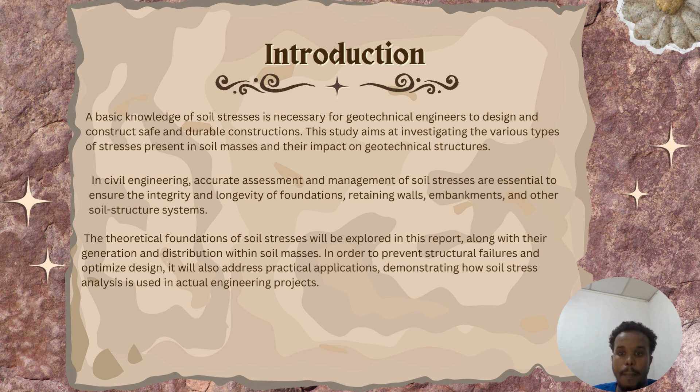I am Muhammad Denis Shekar, and I'm going to present the application of the importance of soil in civil engineering. First of all, it's important for foundation design because foundation stability depends on the soil properties and stresses. Engineers must design foundations based on the specific soil characteristics to ensure structural stability and safety.

It's also important for hazard assessment because understanding soil stresses helps identify potential hazards like liquefaction, sinkholes, and subsidence. Early hazard detection allows engineers to take preventive measures and protect people from potential dangers. Finally, the field vane shear test. This is used for measuring the undrained shear strength of cohesive soil. Useful for assessing shear strength of material like mortar and snow, which can cause landslides.

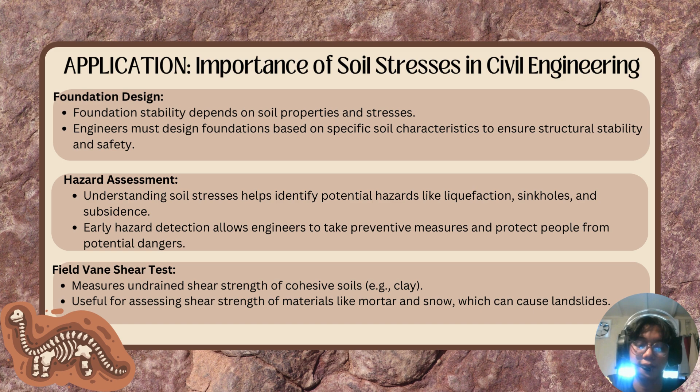Now we will take a look at the soil testing methods that can be applied to understand the characteristics of soils. The first one is the cone penetration test. This test's purpose is to determine the soil characteristics and geological conditions, and it is applied to assess the soil density and behavior to evaluate soil resistance to collapse and predict soil response to earthquakes.

The second test is the Mackintosh probe test. The purpose is to assess the soil bearing capacity, especially on soft surfaces. It is applied in site investigation, foundation design, slope stability, and compaction control. And finally, we have the sieve analysis test, whose purpose is to determine the particle size distribution of granular material, and it is applied in road construction, filter design, foundation design, and earthwork.

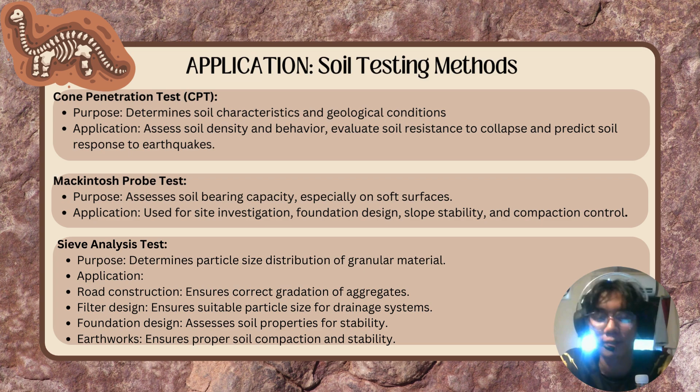Previous case study. So in this project, we will have four different case studies related to our topic. In case number one, we have finding soil particle size through electrical resistivity in soil site investigations. As we know, determining particle size is crucial in civil engineering due to its impact on soil strength and behavior. Also, traditional methods like sieve and hydrometer analysis are time-consuming, costly, and can disturb the soil samples.

So, in this case, the primary objective of this research is to develop and validate a method for determining soil particle size distribution using electrical resistivity measurement. The study aims to establish a correlation between soil resistivity and particle size, providing a simpler and more efficient alternative to conventional sieve analysis.

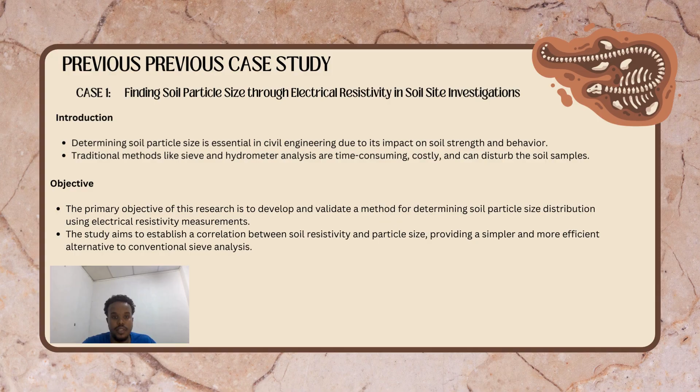So let's move into the methodology. During this research, we collected soil samples from 7 different sites at UKM and labeled them A to G for analysis. Sieve analysis was conducted according to ASTM D422 standards, and electrical resistivity measurements were taken using a high-resistance digital multimeter at different moisture contents, which are 6%, 10%, and 14%.

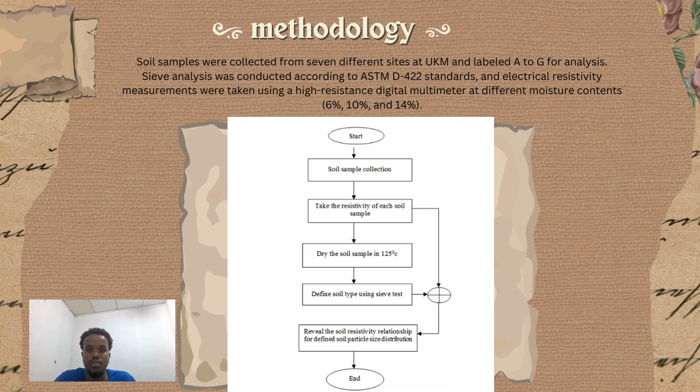As you can see in this figure, we have the flow chart of how we did this research. First, we do the sample collection, then take the resistivity of each soil sample, and we dry the soil sample at a temperature of 125 degrees Celsius. After that, we define the soil type using the sieve test, and in the last stage we revealed the soil resistivity relationship for defining soil particle size distribution.

So after we did the test, we came out with these two graphs. The first one represents the particle size distribution of soil types A, B, and C, and the second one is the soil resistivity measurement. The particle size distribution curves of soil types A, B, and C show the percentage of gravel, sand, silt, and clay in the soil samples.

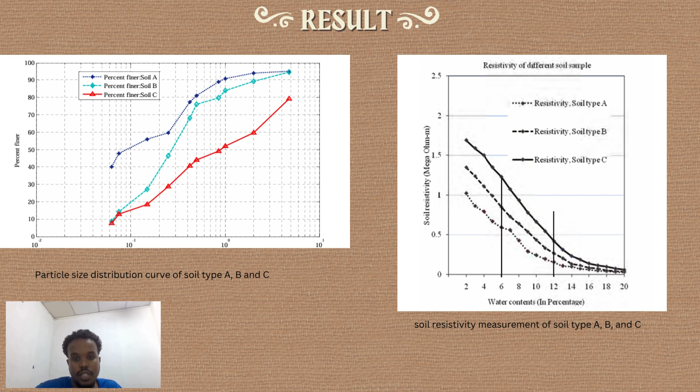So in the soil resistivity measurements, we also took different moisture contents of 6%, 10%, and 14%, showing a correlation between soil resistivity and particle size. Soil type A shows a resistivity of 0.41 megaohm meter, soil type B shows 0.67 megaohm meter, and soil type C shows 0.89 megaohm meter at 8% moisture content.

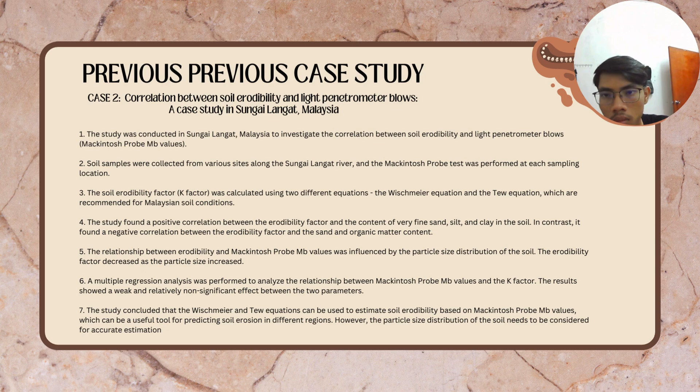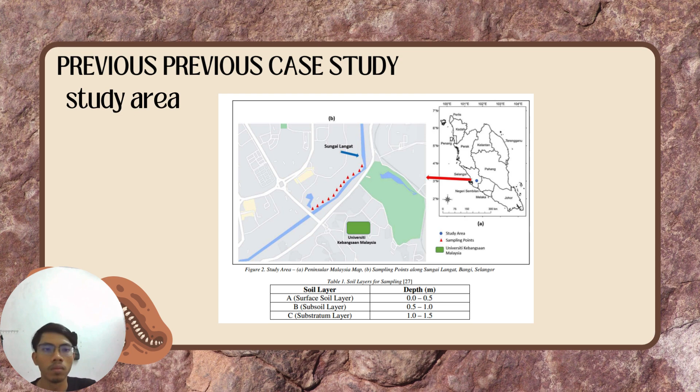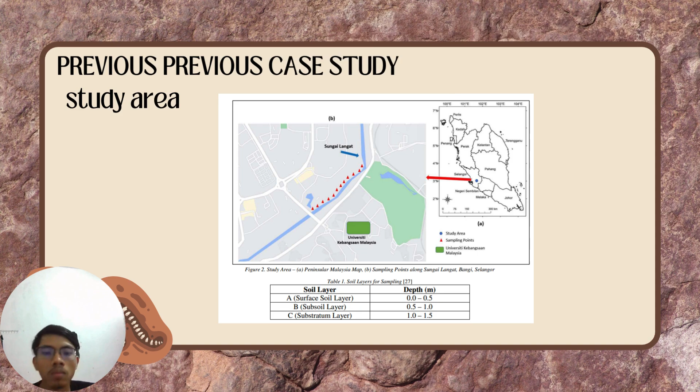The second one is descriptive statistics. The mean values of the K factor for the collected samples from the Sungai Langat site were 0.0050 and 0.0045 for the Tew equation and Wischmeier equation respectively.

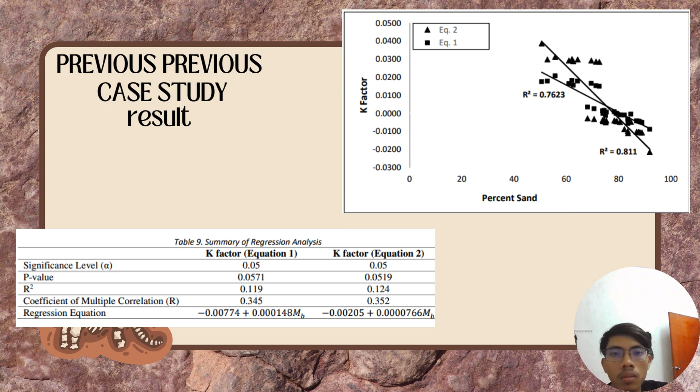And then I will continue about the result of the Mackintosh probe. The first one is Mackintosh probe value. The Mackintosh probe values range from 23 to 241, indicating varying levels of soil resistance to penetration. Number two is correlation with soil properties. The Mackintosh probe values were positively correlated with the fine sand, silt, and clay content, indicating that these particles contribute to the soil resistance to penetration.

The values were negatively correlated with sand and organic matter content, suggesting that these particles reduce the soil resistance to penetration. And the last point is regression analysis. A multiple regression analysis was performed to analyze the relationship between Mackintosh probe value and K factor calculated from both the Wischmeier and Tew equations. The results show a weak and relatively not significant effect between Mackintosh probe value and K factor, with p values of 0.0571 and 0.0519 for the Wischmeier and Tew equations respectively. Thank you.

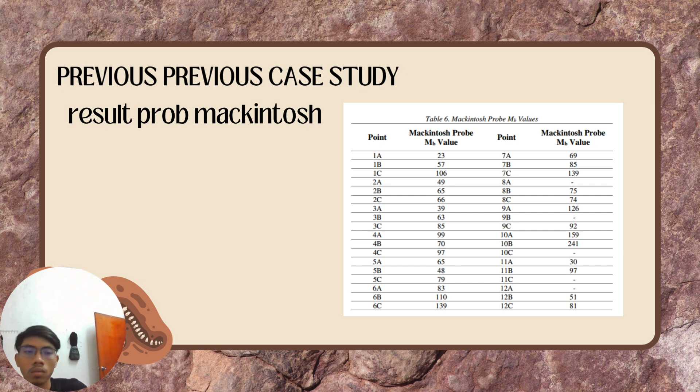Now I'm going to give an overview of my case study, which is case study 3. This project is done nearby the Civil Engineering Lab at Ungku Omar Premier Polytechnic, and the purpose of the research is to discover the relative density of granular soil.

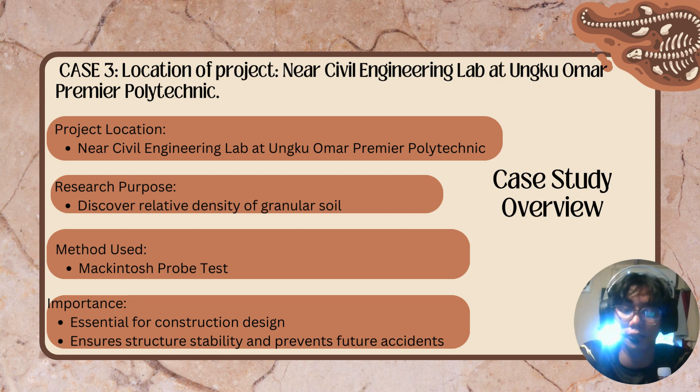Mackintosh probe is used during the test, and this test is important because it's essential for the construction design, to ensure structure stability and prevent future accidents. As for the details of the Mackintosh probe test, the reason we chose Mackintosh over borehole is because the soil at the site is too soft for borehole sampling.

Examples of site soil are gravel, sands, silts, clay with sands, and weak rocks. From the test, we will get soil samples with moisture content info. We will also get soil type identification and classification. And finally, the soil samples can be tested for shear strain disturbance in the lab.

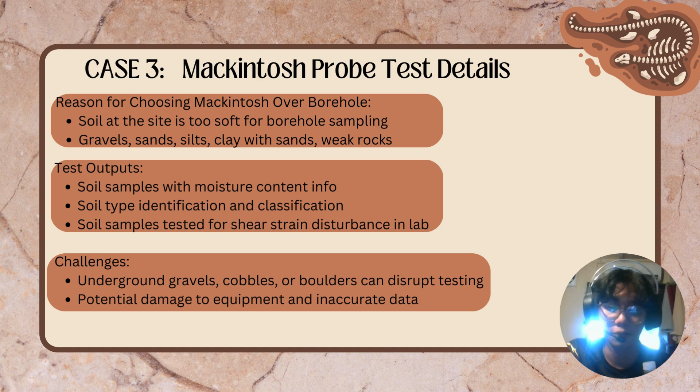Challenges of using the Mackintosh probe test are that underground gravel, cobbles, or boulders can disrupt the testing, there could be potential damage to equipment, and we could gain inaccurate data. The equipment that we will be using during this test is a rammer set, 1.2 meter steel rod, brush, ruler, coupling, bullet clamps, pipe wrench, chalks, and grease oils.

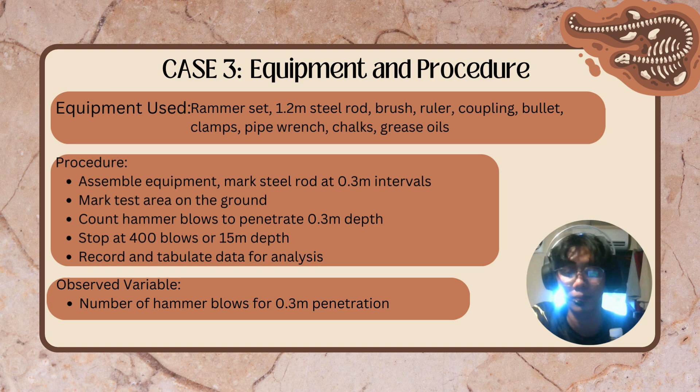The procedure is like this. Firstly, we assemble the equipment, mark the steel rod at 0.3 meter intervals, and then we mark the test area on the ground and count hammer blows to penetrate until 0.3 meter depth. Then we stop when the blows reach 400 blows or 15-meter depth. Then we record and tabulate data for analysis. From this observation we will get the number of hammer blows for 0.3 meter penetration. Now I will present the results and analysis from this research.

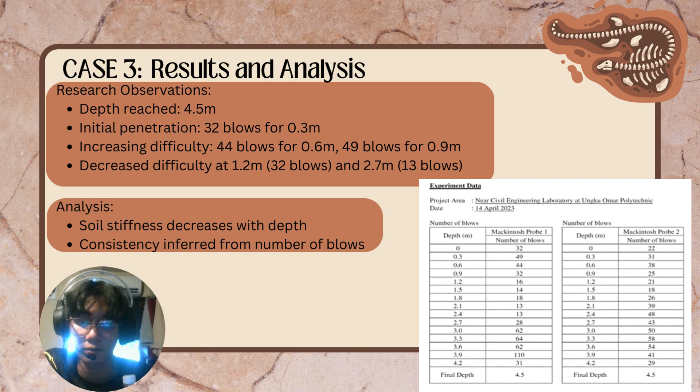Research observations state that the depth we reached is 4.5 meters and the initial penetration took about 30 blows for 0.3 meter. Then the difficulty increased, as it took 44 blows for 0.6 meter and 49 blows for 0.9 meters. But then the difficulty decreased at 1.2 meters, which is 32 blows, and 2.7 meters, which took only 13 blows. The analysis we can take from this test is that soil stiffness decreases with depth, and consistency is inferred from the number of blows.

So for case 4, geotechnical properties of waste soil from a closed construction dumping area in Serdang, Selangor, Malaysia. The waste soil is collected from a closed construction dumping area near Petronas Solaris, Serdang, Selangor. The soil originated from the construction of nearby buildings, which are nearly completed. The site was selected because it contains construction waste that meets the study's criteria. Three samples are collected from different locations within the dumping area.

Four tests are conducted on the samples to determine their properties. The first test performed was a sieve analysis to determine grain size and classify the soil. The study aims to determine geotechnical properties of the waste soil. The research process is depicted in a flowchart starting from a literature review to property determination.

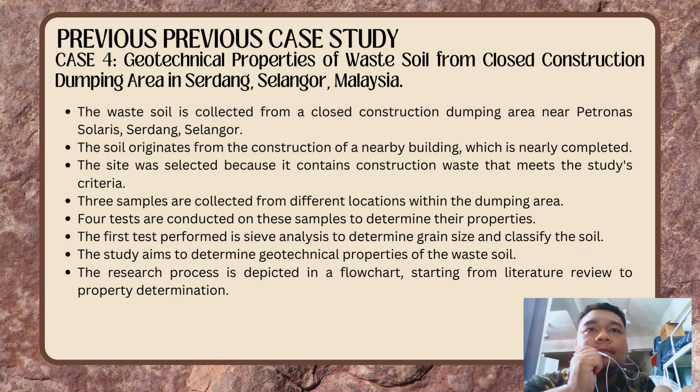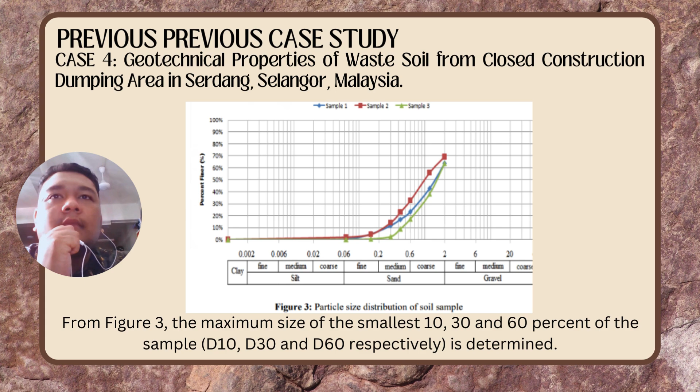For the coefficient of gradation, Cc values are found to be 1.32, 0.87, and 1.09 for sample 1, sample 2, and sample 3 respectively. A well-graded soil typically has a Cc between 0.5 and 2.0. Thus all three samples are also considered well-graded since their Cc values are within the range of 0.5 to 2.0.

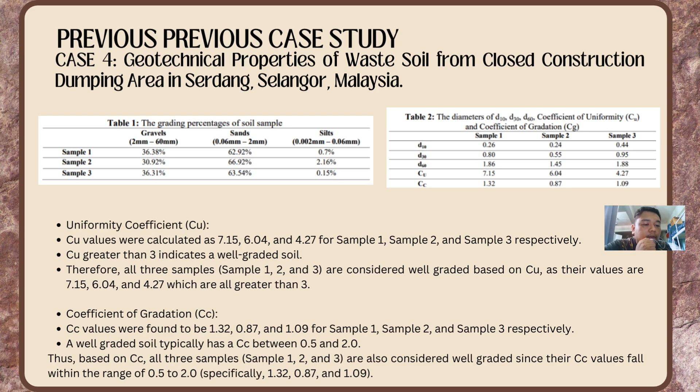So we will move into the discussion for case 1. The study demonstrates that electrical resistivity is a viable method for determining soil particle size distribution. This technique offers several advantages over traditional sieve analysis, including reduced sample disturbance, faster testing times, and lower costs. The variation in resistivity based on particle size and moisture content provides a reliable metric for soil type identification in geotechnical investigations. The optimal moisture content range ensures consistent and accurate resistivity measurements.

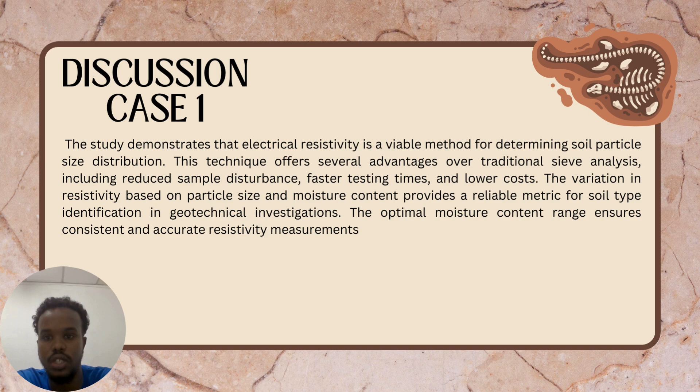Okay, Bismillahirrahmanirrahim. I will continue the discussion about my case study. The first one is the correlation between soil erodibility and light penetrometer blow. The study investigated the correlation between soil erodibility and light penetrometer blow in Sungai Langat, Malaysia. The results show that the erodibility factor calculated using both Wischmeier and Tew equations was positively correlated with very fine sand, silt and clay content. It was negatively correlated with sand and organic matter content.

For the second one, particle size distribution, the relationship between erodibility and light penetrometer blow was influenced by the particle size distribution of soil.

The erodibility factor decreased as the particle size increased, which is consistent with the idea that the larger particle is more difficult to detach and transport.

So the last one is multiple regression analysis. A multiple regression analysis was performed to analyze the relationship between Mackintosh probe MB value and K factor. The results show a weak and relatively non-significant effect between Mackintosh probe MB value and K factor calculated from both Wischmeier and Tew equation. Okay, that's all from me.

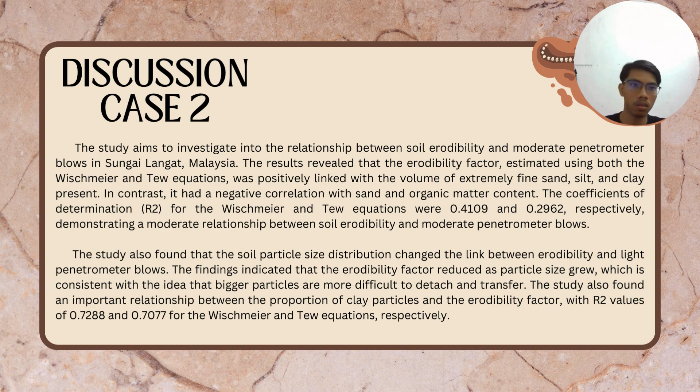Now I'm going to present the discussion of case 3. The study conducted by civil engineering students near the civil engineering lab at Ungku Omar Premier Polytechnic utilized the Mackintosh probe test to assess the relative density of granular soil due to its simplicity and cost effectiveness. This method is favored for site investigation that helps ensure structure stability by considering soil properties and strength during design.

Despite challenges such as underground obstacles that can skew results and damage equipment, the test provides valuable data on soil moisture content, type, shear strength, and information that is crucial for designing safe and stable structures, underscoring the importance of thorough soil testing in construction projects.

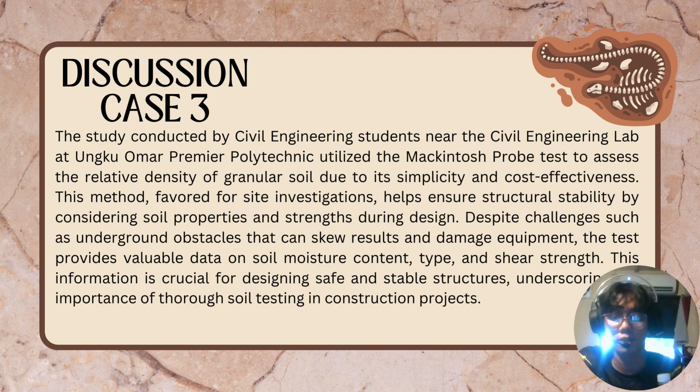Discussion case 4. The analysis of particle size distribution of samples 1, 2, and 3 reveals they are coarse grain soils, predominantly composed of gravel and sand. Sample 1 consists of 99.3% gravel and sand, clearly meeting coarse grain criteria. Samples 2 and 3 also show high percentages of gravel and sand, confirming their classification. Notably, samples 2 and 3 include gravel composed of natural and concrete mixture.

These details are crucial for understanding soil mechanics and chemical properties, essential in engineering for foundation design, soil sustainability assessment, and environmental impact evaluation. Detailed soil analysis ensures informed decision making in construction projects.

Additionally, all three samples exhibit well-classified soil properties based on their uniformity coefficient (Cu) and coefficient of gradation (Cc), with Cu values of 7.15, 6.04, and 4.27 and Cc values of 1.32, 0.87, and 1.09 respectively. These values indicate broad grain size distribution and confirm their well graded classification, contributing to their engineering classification and sustainability assessment.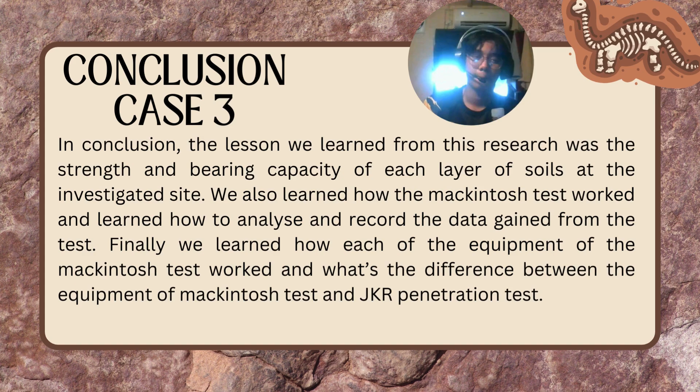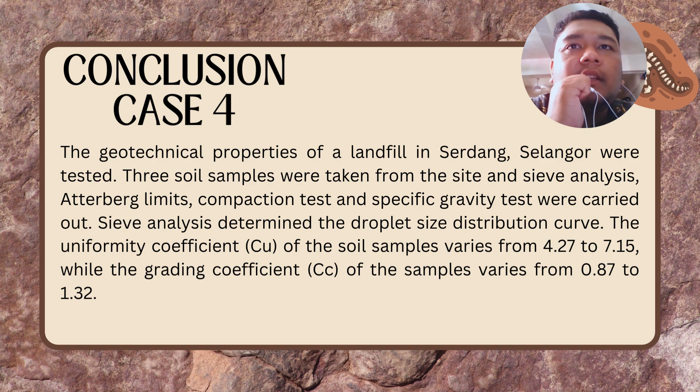For the conclusion, case 4, the geotechnical properties of a landfill in Serdang, Selangor were tested. Three soil samples were taken from the site and sieve analysis, compaction tests, and specific gravity tests were carried out. Sieve analysis determined the particle size distribution curve. The uniformity coefficient (Cu) of the soil samples varies from 4.27 to 7.15, while the grading coefficient (Cc) of the samples varies from 0.87 to 1.32.